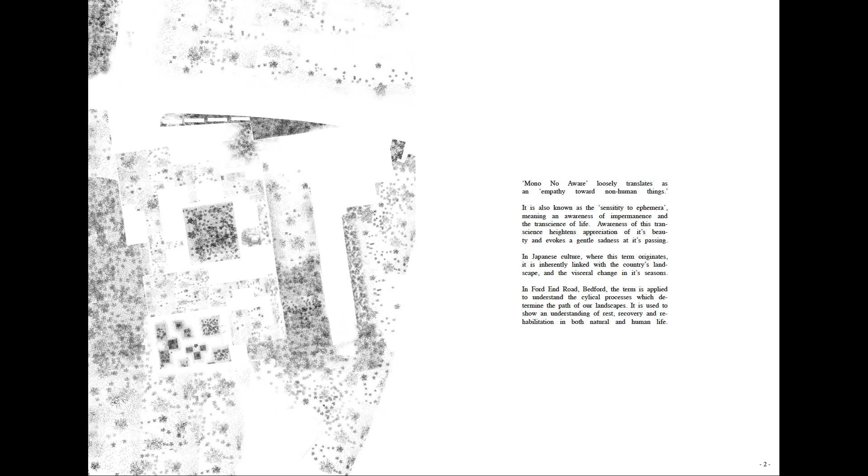It is used to show an understanding of rest, recovery, and rehabilitation in both natural and human life. Therefore, this is a story about time.

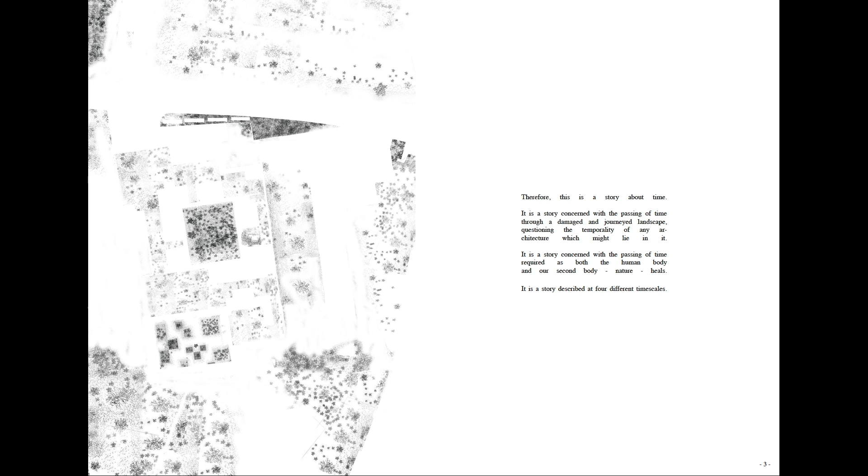It is a story concerned with the passing of time through a damaged and journeyed landscape, questioning the temporality of any architecture which might lie in it.

It is a story concerned with the passing of time required as both the human body and our second body, nature, heals. It is a story described at 4 different timescales: the century, the decade, the year, and the day.

Finally, I conclude with the proposal itself. The first timescale is that of the century.

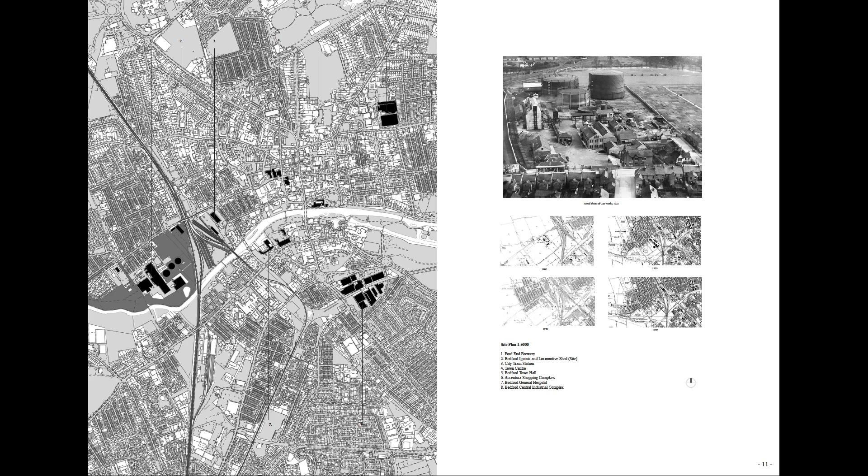The project reminisces on the industrial past of the landscape, and specifically its existence for over 100 years as a gasworks. Traditionally seen as an oppositional force to the natural ecosystem, the landscape strategy looked to herald and celebrate this past, imagining a future in which industry and nature existed in synthesis.

This began with understanding the biological, ecological, and physical effects of the gasworks at both a microscopic and macroscopic scale.

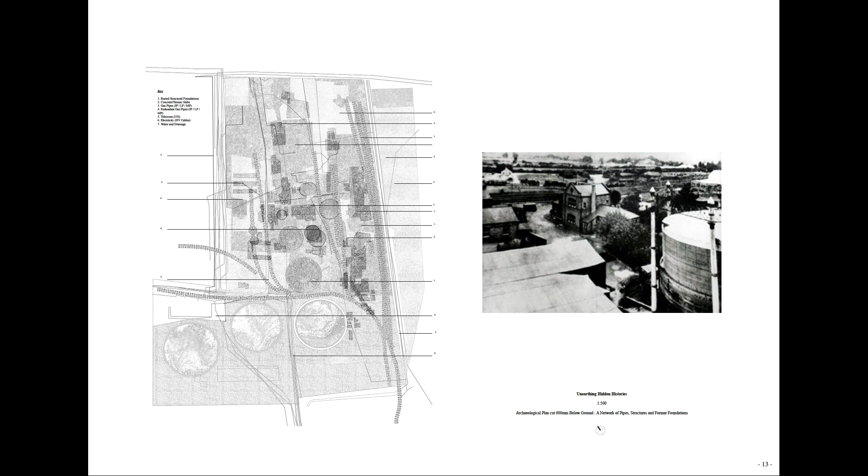In addition to these findings, we discovered buried foundations of the former gasworks, explored through an archaeological plan cut 600 millimeters below ground surface. Unearthing these hidden histories, the foundation had a subliminal horticultural impact on the site, affecting the growth of certain resilient species.

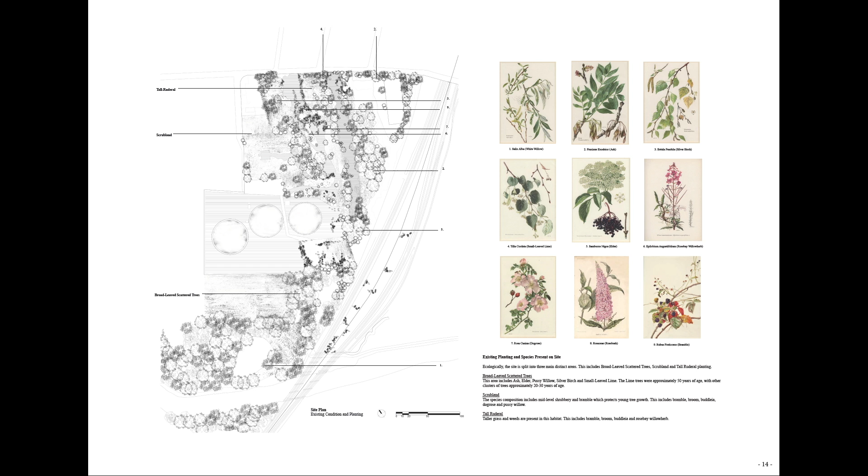Such as dog rose and bramble, and hindering the growth of larger trees such as oak and lime. Our landscape manifesto for the site was as follows.

We believe the physical erasure of the site's past was merely superficial, and that the remnants of this force were in the landscape formally, metaphorically, and biologically.

Lastly, through the addition of new biogas holders, the site returned to its former purpose, providing clean energy to Bedford for 100 more years to come.

In Tim Ingold's The Temporality of the Landscape, he calls upon us to critically engage with the idea of past, present, and future in respect to a constantly changing landscape environment.

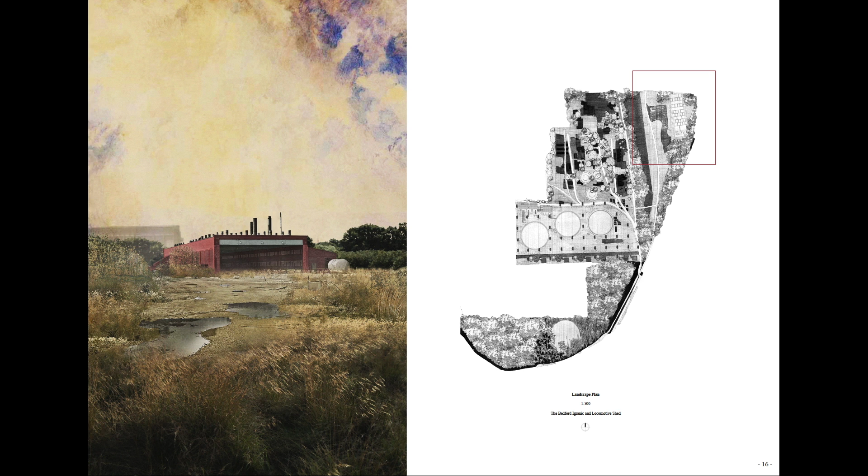No object was more so representative of this temporality than a disused locomotive shed found northeast of the site. It had existed to house coal cargo trains arriving to the gasworks as early as 1880. It now appeared as a ruin, where nature had come to reclaim ground which was once its own.

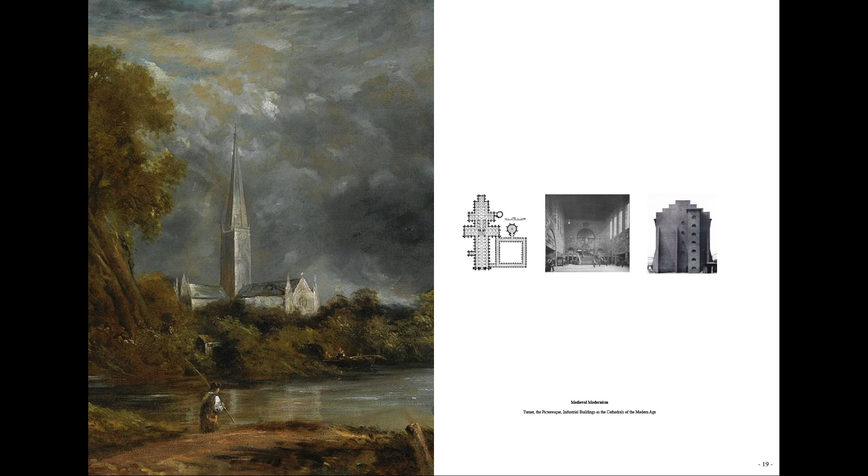I understood it to have cathedral-like qualities. Like the buildings of Poelzig and Behrens, the shed stood at the time as a cathedral of the modern age, in awe of its power, might, and authority. Simultaneously, it had qualities of the picturesque, and an ability to hybridize nature, the individual, and monumentalism.

Formal analysis for the shed confirmed its cathedral-like qualities. It had a central nave and aisles, alongside several buttressed lean-to structures. A long central hall gave the structure a natural procession, whilst formal analysis of the structure also revealed a pre-existing hybrid masonry and timber structure.

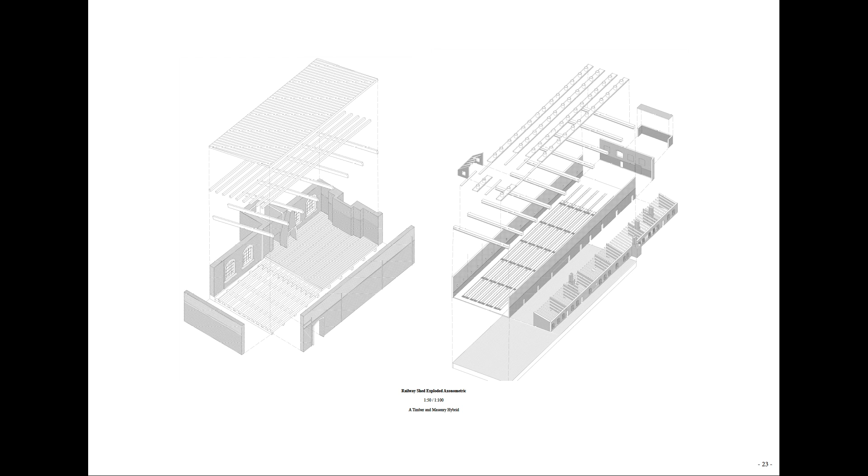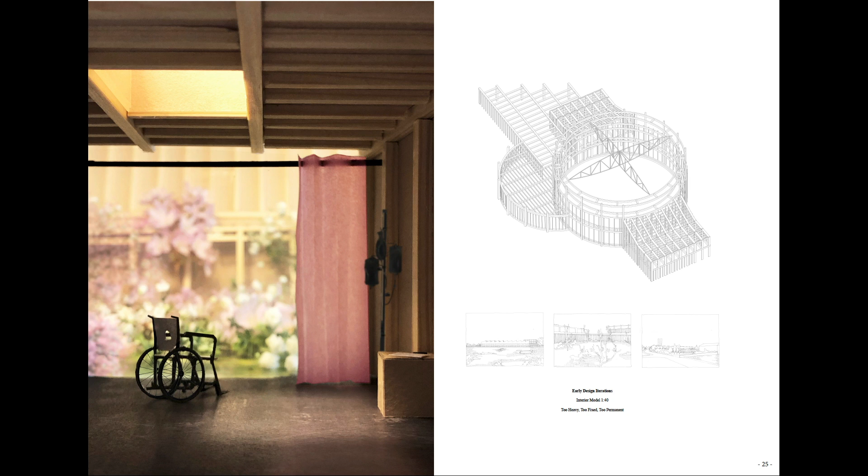The second timescale is that of the decade. Initial exploration of 2 rooms, a patient room and a main hall, revealed an architecture, and in particular a construction, which played up to the monumentality of the railway shed.

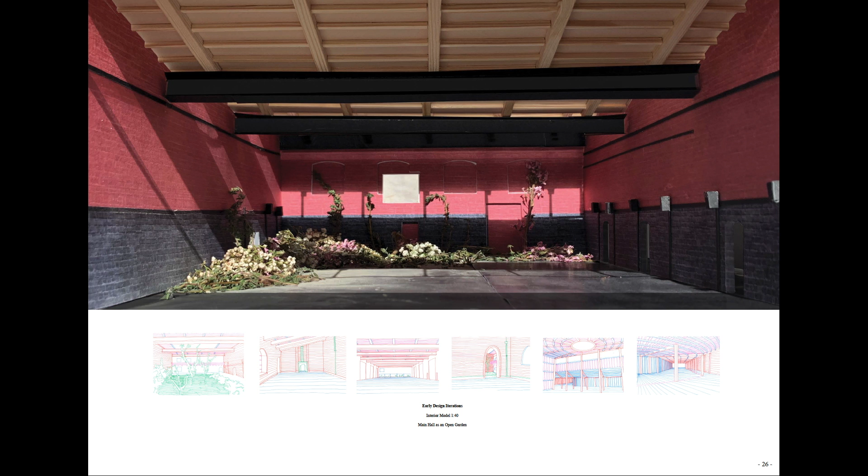This monumentalism dwarfed the experience of the individual and was too heavy, too fixed, too permanent. Research into Lacaton Vassal's Maison Latapie explored the ideas of primitivism in architecture.

Their buildings offered an over-provision of space in order to accommodate large atrium spaces which allowed a blurring of threshold between inside and out. Particularly in their construction, expedient materials matched with bolted connections and thin structural members allowed the architecture to be transient, fleeting, and light.

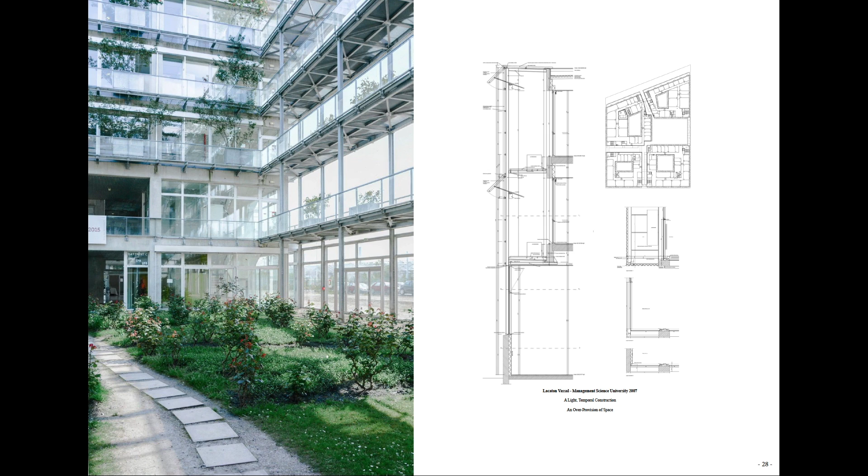In the Management Science University, these large greenhouse-like spaces created quasi-exterior environments in which nature was brought into the building.

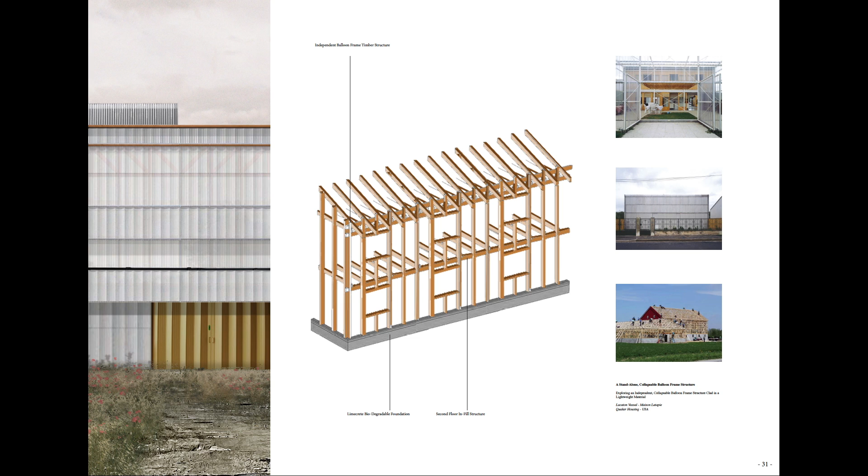In initial structural ideas, I explored how a light timber frame could be built within, on, and beyond the existing shed, exploring a balloon frame construction wrapped in a light polycarbonate skin.

An initial construction section looked to reinterpret the industrial heritage of the site formally, as well as accentuate light, lean-to structures that were buttressed against the shed wall.

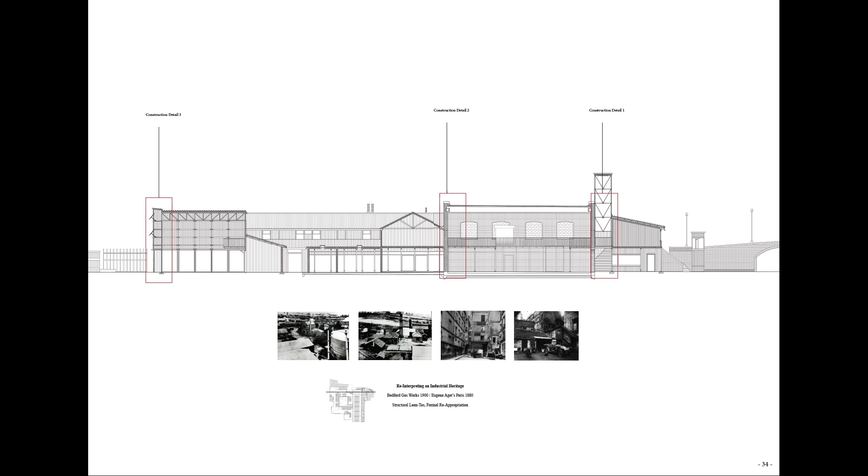Construction details at 1 to 20 and 1 to 5 were further explored at 3 points along this section. In these construction details, I looked to herald bolted and screw joints.

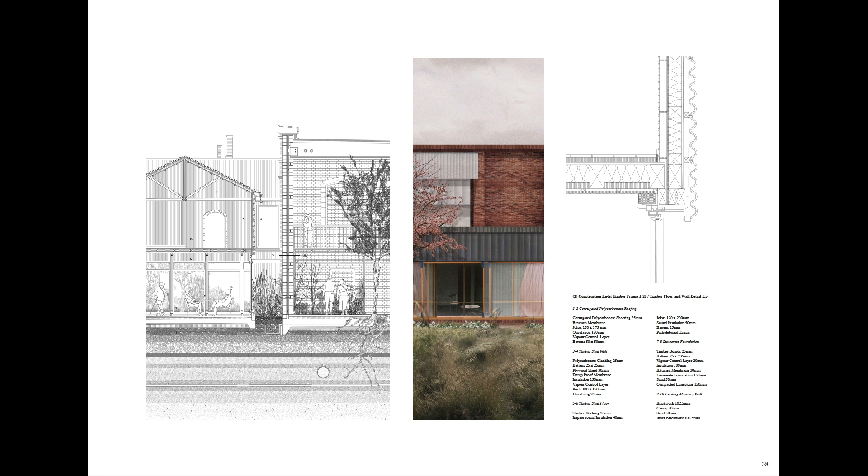I detailed expedient connections which enable the construction to be bolted on and off with ease. Through these details, I described an architecture which was fleeting and temporary, designed to be deconstructed and disappear again after 10 to 20 years. Minimizing the weight of the walls and reducing the size of timber members allowed me to not just be more economical with material use, but also touch the ground extremely lightly. For more annotation on these details, please refer to the associated technical booklet.

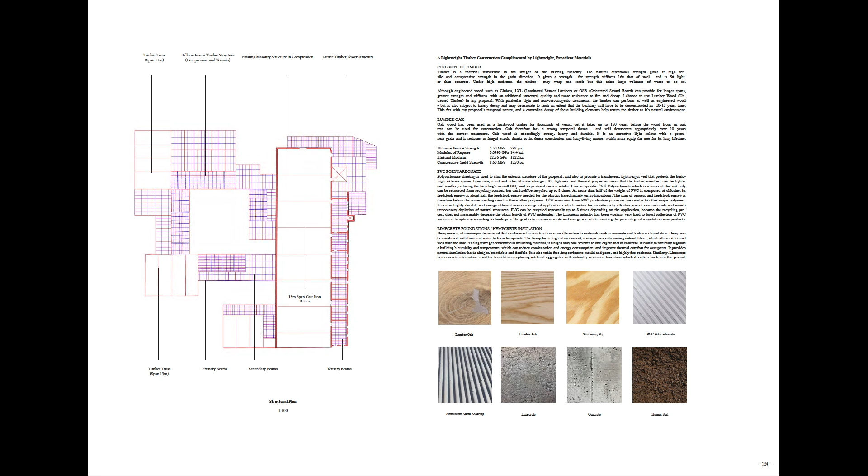A palette of construction materials was formulated to create a transgressive frame subversive to the monumental construction of the masonry shed. It included lumber oak, subject to controlled decay, a recyclable PVC polycarbonate facade, and limecrete foundations which degraded into the soil. The idea of controlled deterioration of the building was formed in conjunction with the construction details to not only create a structure which could easily be assembled and disassembled, but that the structure was also subject to natural decay and would return to the earth after 10 to 20 years of use.

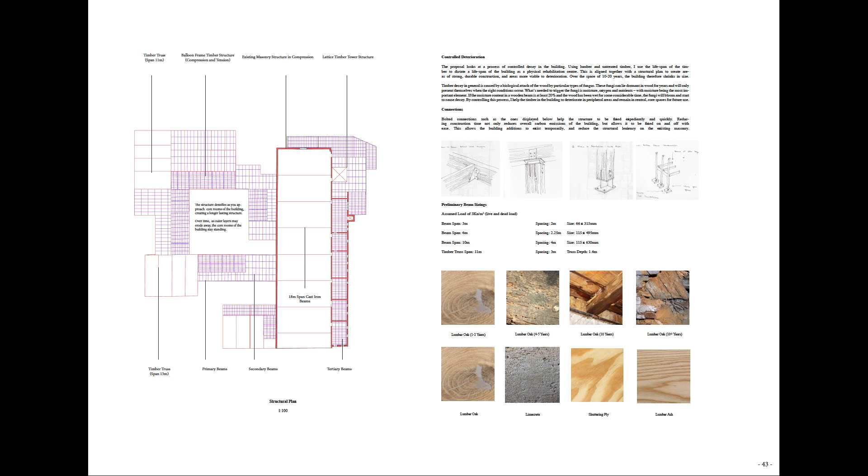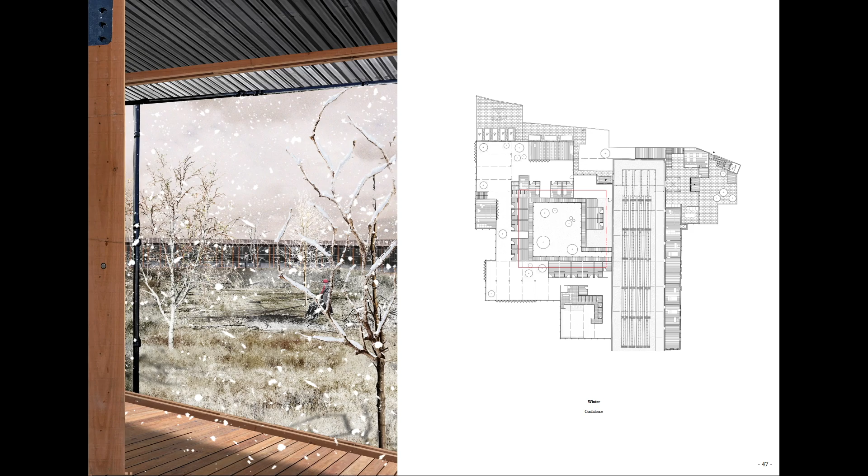The third timescale is that of the year. The journey to recovery begins in summer, with the heat of injury and the recluse of the room, to autumn, where there are first steps into an enclosed courtyard, to winter, where there is confidence, growing assurance in a new body, and finally, to spring, where there is recovery.

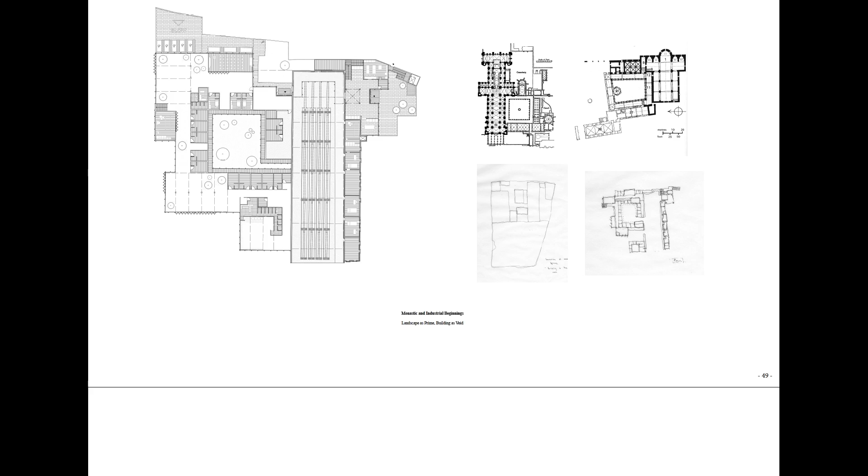The passing of time at the scale of the year has a significant impact on the plan. It is rooted in monastic and industrial formality, owing to an understanding of the spatial organisation of Durham Cathedral and Le Thoronet Abbey, and their ability to straddle monumental spaces with close, protected ones. As with Lacaton-Vassal, oversized circulation spaces in the plan warm core patient rooms without the need for insulation and provide communal spaces. Most importantly, a continuous ground runs through these spaces, kept as the original ground cover of the site.

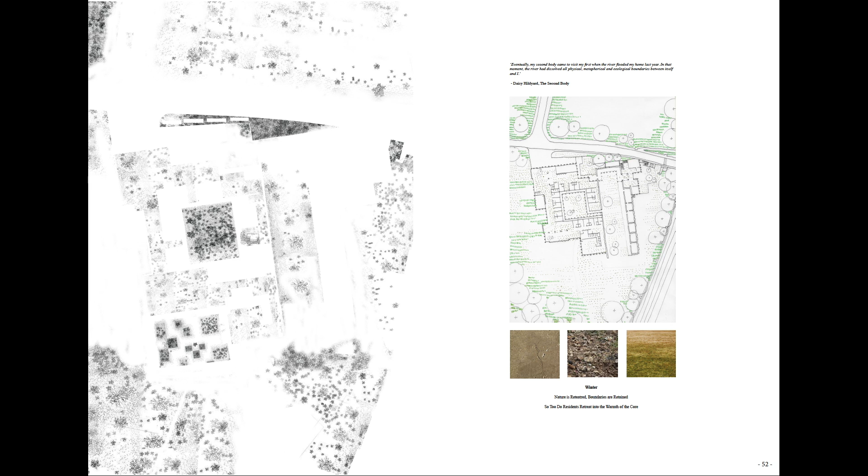Critically, this ground cover is subject to high seasonal change. I imagined the ground according to Daisy Hildyard's The Second Body, where she described the river bursting its banks and flooding into her home as the moment in which she met her second body, nature. In winter, the ground cover therefore is in a retreated state, a low tide. The thin, lightweight construction provides a firm boundary as the patients retreat to the warmth of the core rooms.

In spring, the tide of nature gathers pace and grows further into the landscape. It arrives at the thin wall of the proposal, but does not breach it. So too, the residents emerge from the winter warmth and use these large spaces for communal activities. In summer, the ground floods the plan and breaches the threshold. This has a transformative effect on the spatial arrangement of the plan.

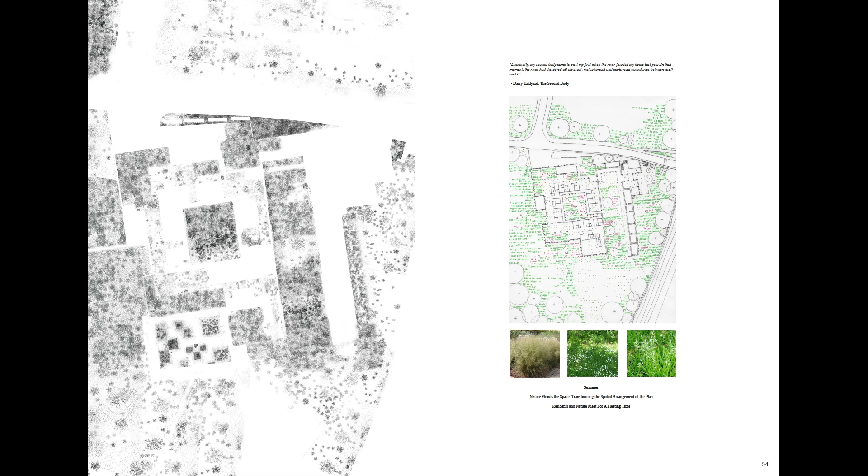Spaces which do not exist in winter appear in bloom for the first time in summer and die away again as autumn comes. This swelling and constricting of ground cover is constructed in symphony with the movement of people from the core to the periphery of the building.

This is horticulturally achieved through a selection of flowering plants and grasses that have high seasonal change and a resilience to gravelly surfaces. This includes carex grass, miscanthus, luzula grass, or even the simple daisy. This self-sufficient process allows these specific species to fall away and shrivel in winter to provide a mulch for new seeds to grow. By creating large quasi-greenhouse spaces within the building, plants are subject to an accelerated bloom.

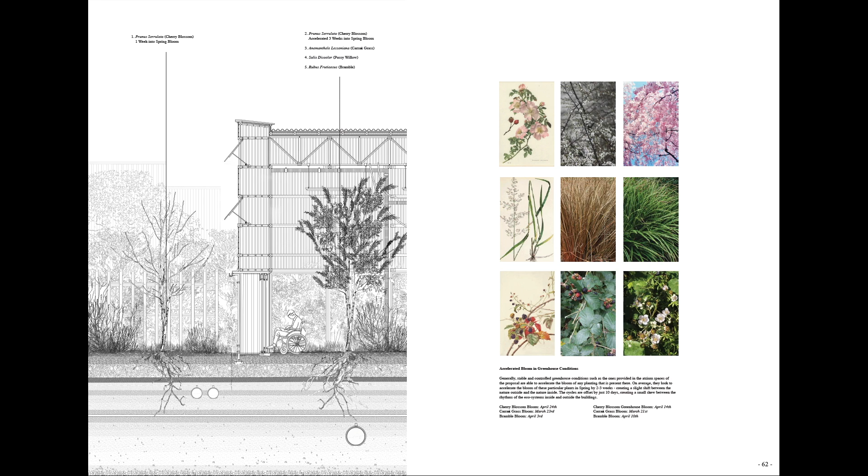This accelerated bloom means that plants within the building may signal the oncoming change in seasons, some 10 to 16 days before their exterior counterparts. In this way, the building itself operates as a subtle signifier of the passing of time. This is facilitated by the particular environmental conditions of these spaces, detailed in the associated technical booklet.

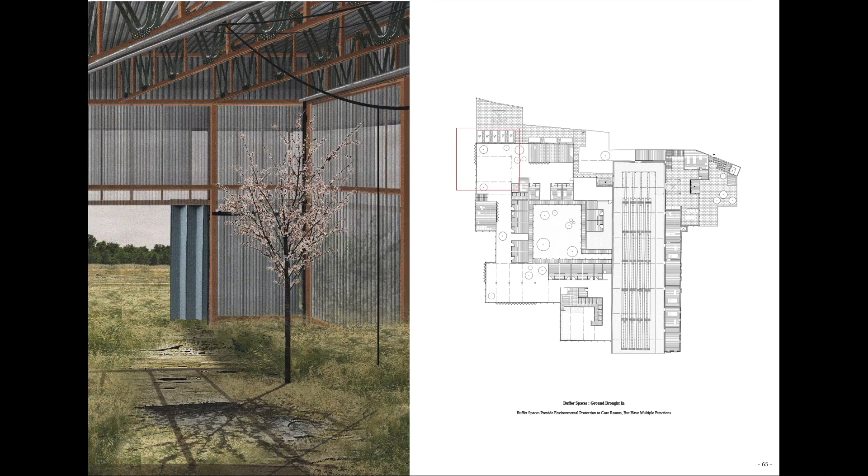Seasonal change in the plan doesn't just have a spatial impact, but a programmatic impact too. Spaces like these bring nature in, but across the year have multiple communal functions for patients. In winter, the hard ground provides space for physiotherapy. In autumn, semi-hard ground allows space for performance. In spring, as the ground floods in and becomes richer, garden therapy. In summer, full ground cover is the perfect setting for an art class.

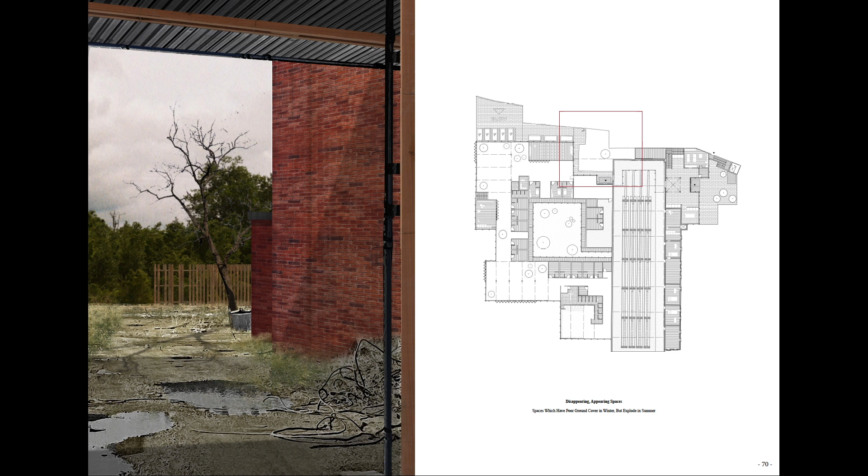Seasonal change in the plan also causes spaces to appear and disappear at certain times of the year. Back-of-house courtyards like this, which revel in their forgotten and abandoned qualities, may be used for storage in winter, picking leaves in autumn, an arrival garden in summer. This, therefore, is the spatial, programmatic, and experiential impact of the plan and its synthesis with nature across the year.

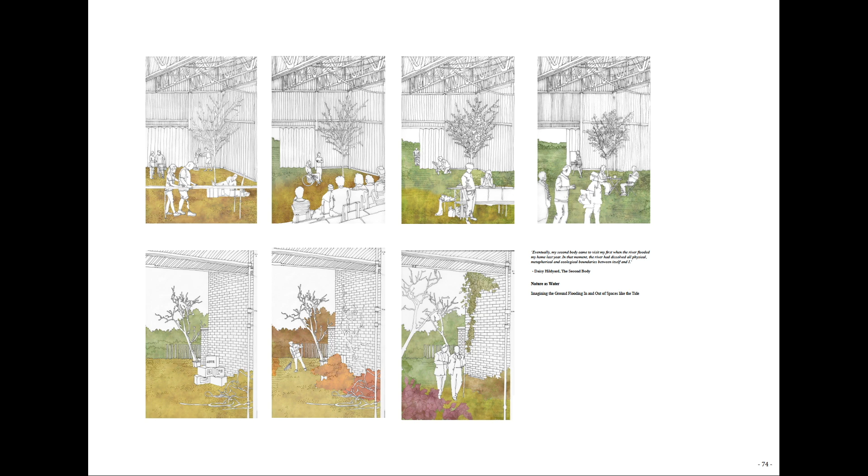The last timescale is that of the day. Inspired by Lucien Hervé's photography of Le Thoronet Abbey, I saw there to be a strength in darkness, where dim, closed rooms were used for the comfort of recovery. At the same time in the day, sunlight could be used to provide reflection, which maintained the patient's privacy.

Similarly, I explored the strength of light, and at how at different times of the day it may strengthen or soften the texture of a masonry wall. Alongside this, I constructed the structural density of the building along with the colour density of its interior.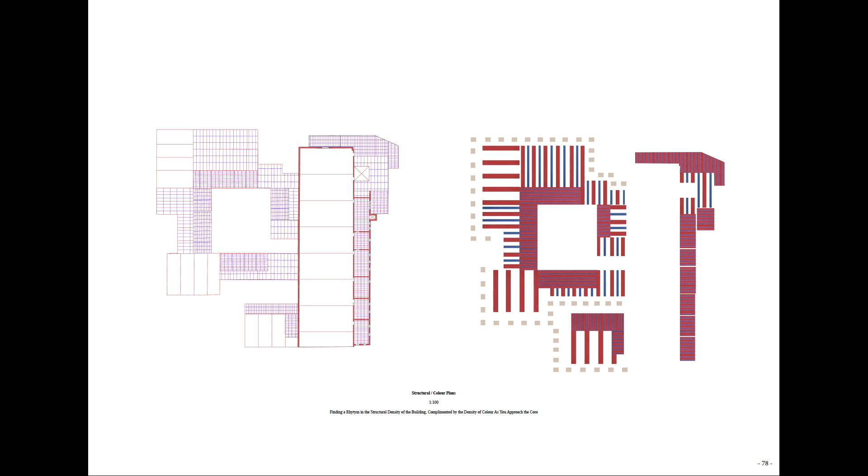Here, primary, secondary and tertiary beams were coloured red, blue and pink. A thin, translucent polycarbonate veil wrapped the building and revealed little of this colour on approach. Inspired by Josef Albers' colour test number 34, the festive colour of the building intensified as you drove further in. As the structure became denser toward the core patient rooms, so too did the colour scheme.

However, this colour scheme was not stagnant. On a cherry blossom branch in strong direct sunlight, the colours became saturated and vibrant, but as the sun wanes and the weather becomes overcast, the colours desaturate and dim, making a similar analogy with the colour scheme of the beams. As the sunlight pans across the structure, so too do its colours flicker and dance. Therefore, the building is in constant motion in alignment with the light of day.

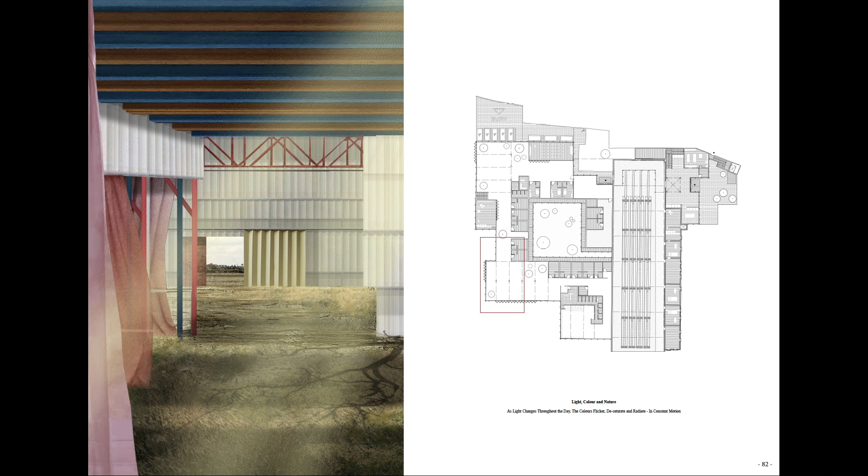A northern facade facing the street gives the proposal a subtle civic presence. A campanile lantern to the east calls to the city beyond the bridge. However, on approach, the entry to the building is much more subtle.

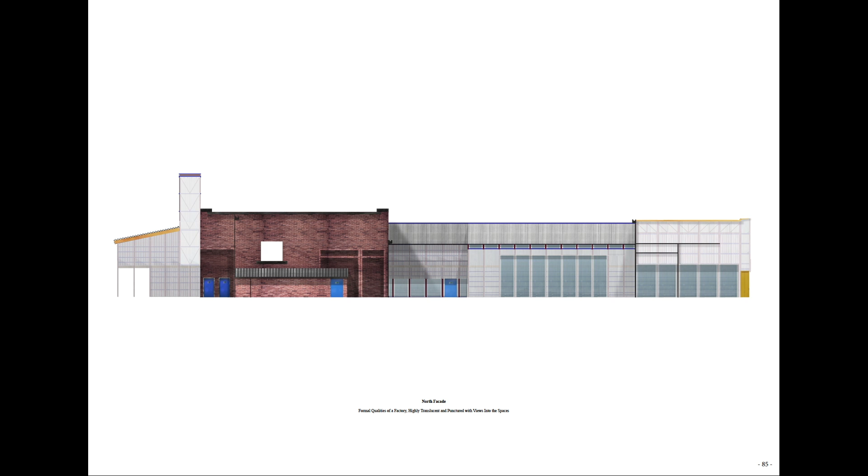The facade harks back to an industrial formality, where a highly translucent thermal skin is accentuated by patches of colour in order to enliven the streets. A light construction gives primacy to green spaces, which both envelop and are contained inside the facade.

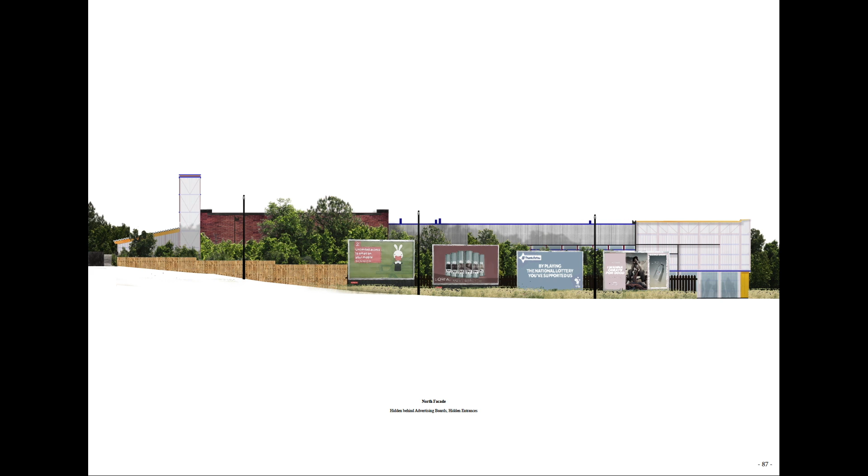Warmth and coolth similarly oscillate as you traverse the building, as patients move from warm, insulated core rooms to semi-insulated buffer zones and into fully open spaces. In section, these bioclimatic buffer zones help to warm central core rooms without the need for insulation, whilst enabling the construction to be significantly lighter.

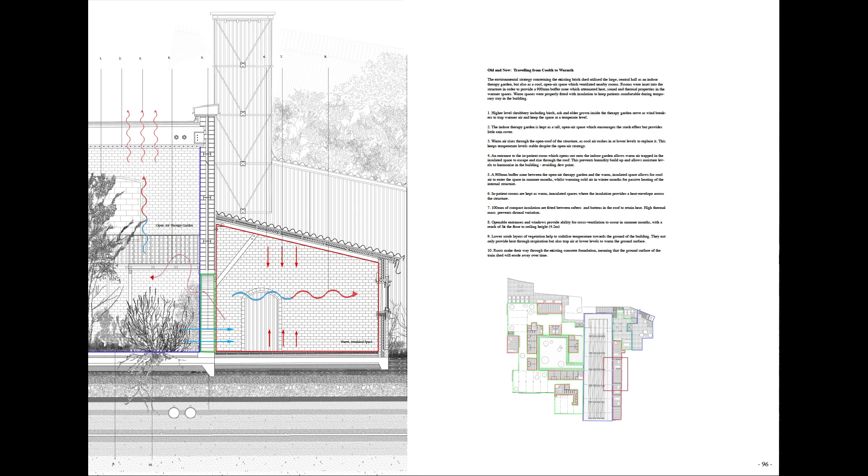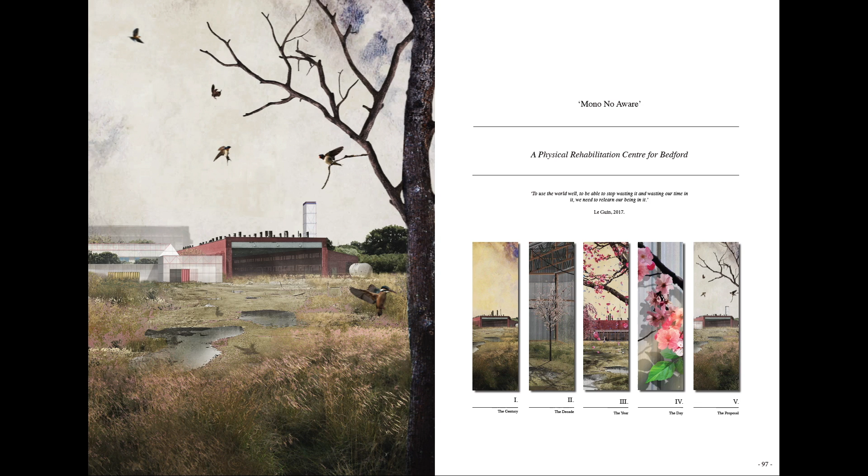The final proposal encompasses the sentiment of Mono no Aware. As a physical rehabilitation centre, it revels in the scales of time that pass as the individual process of recovery begins. As a proposal, it revels in the temporality of the landscape on which it lies, understanding that its presence is subject to much larger cycles of hydrology, ecology, and horticulture.

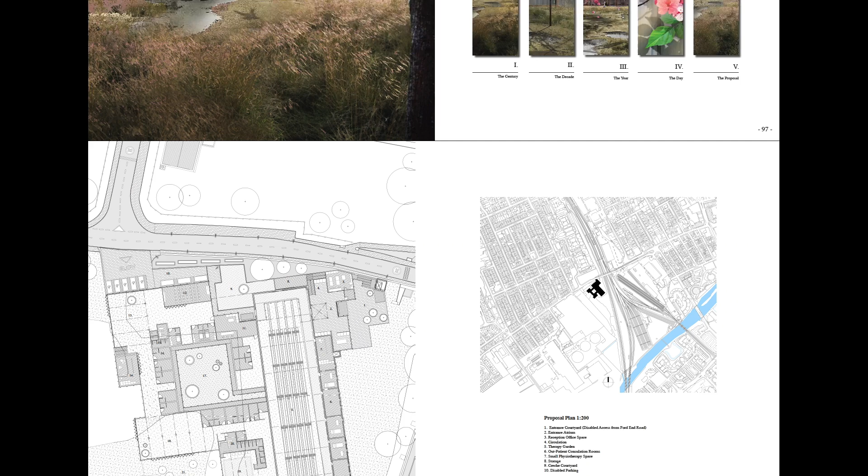The plan describes core residential rooms, centred around an internal courtyard, whilst an overprovision of space provides communal patient spaces. A street frontage to the north provides two formal but disguised entrance courtyards, whilst the large main hall remains as an indoor therapy garden and overrun ruin.

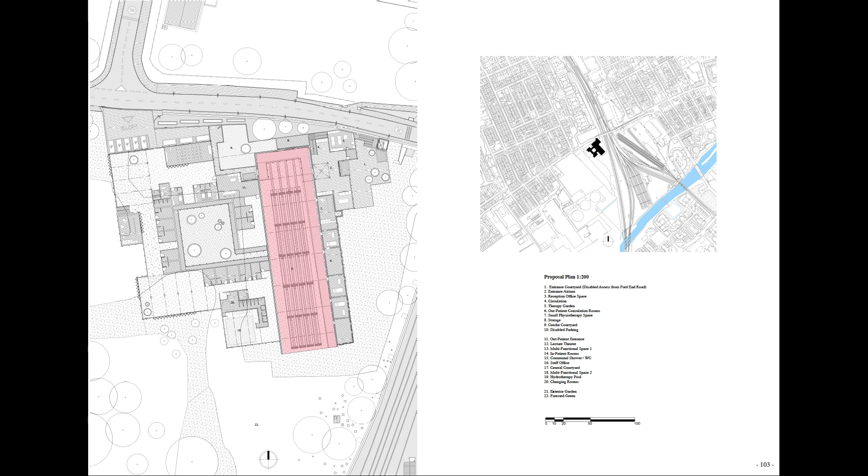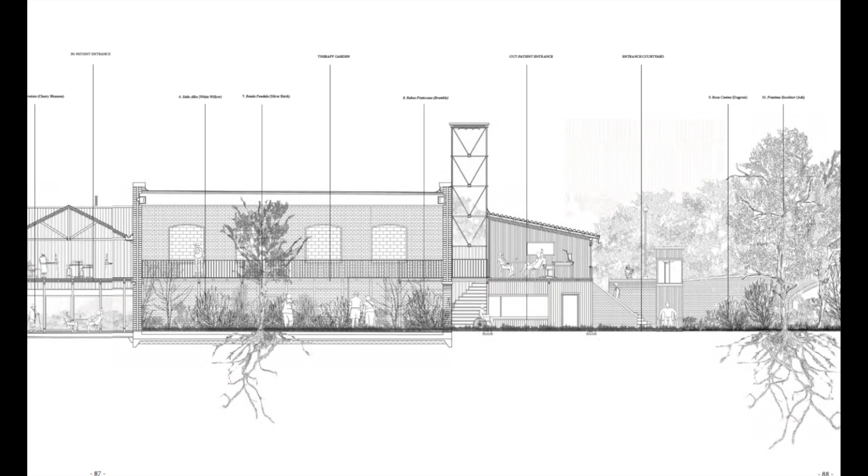The individual is taken on a journey through spaces which continually challenge the threshold between inside and out. Moving to core patient rooms, the individual is given access to communal spaces which open out onto the landscape beyond.

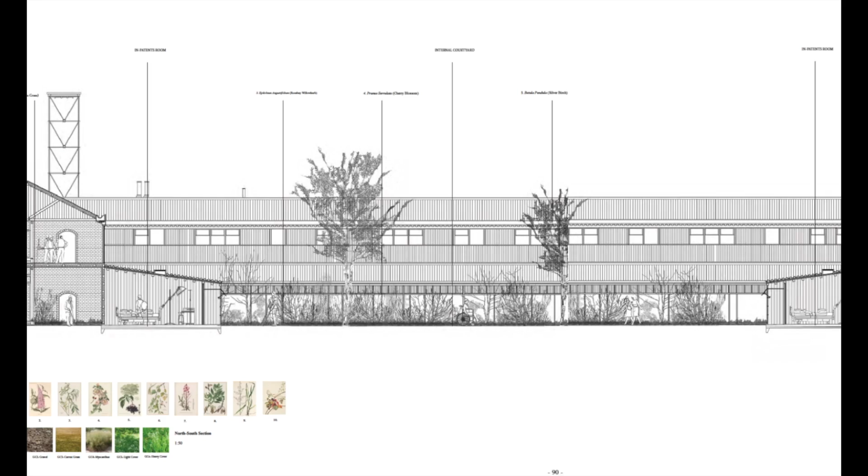A section cut north to south describes a more linear journey. A two-storey space attached to the existing masonry descends into a small-scale patient room, which backs out onto an internal courtyard. This is mirrored before a patient's room opens out onto a quasi-exterior communal space.

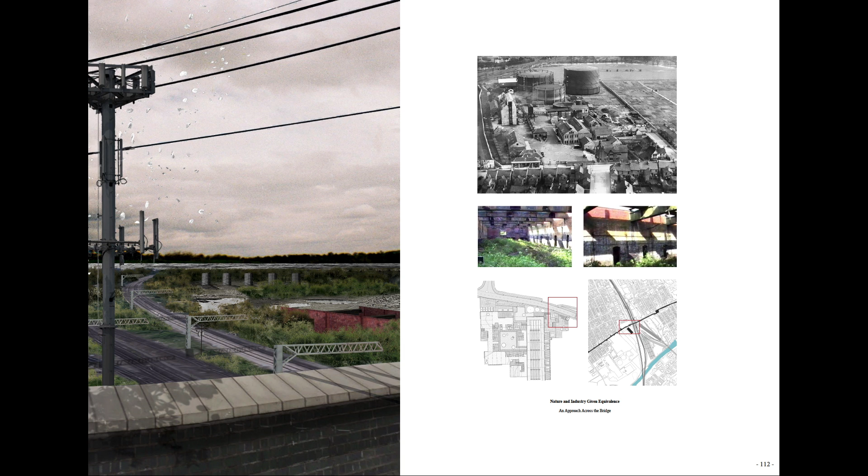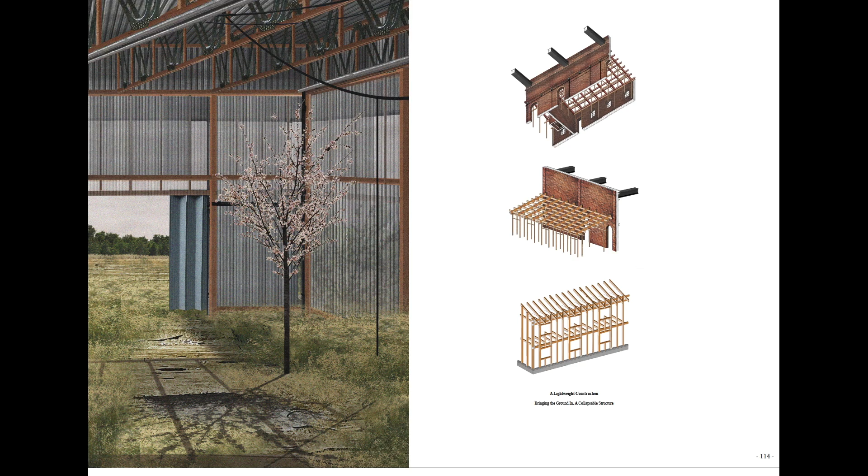Alongside this, an environmental strategy continually oscillates warmth and coolth. The proposal also operates with high seasonal change for both the individual and the plan itself. Finally, it flickers in constant motion as light, colour and warmth dance in alignment with the length of the day.

Throughout this project, we have undergone a journey of change, transience and impermanence. No object in the landscape embodies the themes of Mono no Aware so viscerally than that of a disused locomotive shed. Indeed, in the present day, the shed is a ruin, abandoned.

In 10 years' time, the ruin is inhabited, transformed. In 100 years' time, it will return to a ruin, and nature will have reclaimed a ground which was once its own. Past, present, and future align as the site comes full circle. This, therefore, is Mono no Aware, an awareness of impermanence.